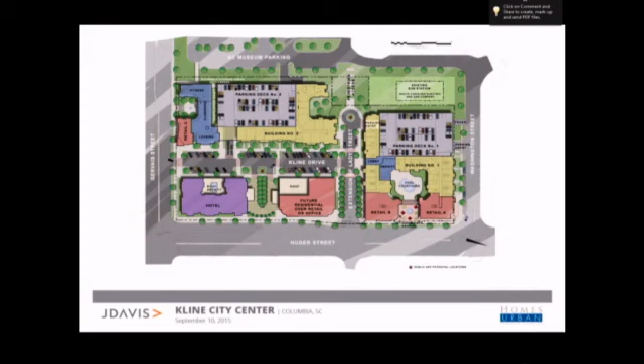Thank you, hello again. As Russ said, we've made considerable effort over the last 30 days to work with staff and address what we thought were some good, compelling comments at the last meeting. So I'll jump into it. Rather than proceed according to the comments, I thought it might be easier to walk around the buildings and address how we've accommodated comments, first on Building 1 and then on Building 2.

This is an overall plan of both buildings, of the entire site, with areas redlined that are specific to areas we paid additional attention to. Generally, the comments were about the finer grain details of the pedestrian experience around each building, and a lot of them had to do with scale and detail. So we've looked at the areas around the commercial areas, specifically the storefronts, and also the area on, well, let's start on Washington Street.

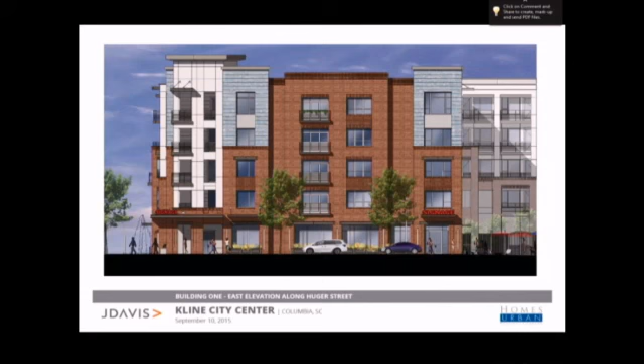It matches the lintels, and it's a steel channel. On top of that channel we propose LED lights, forming up and down lights that we've had success with in the past.

I'm going to move on to the Lady Street elevation. At the commercial storefronts around the corner of Lady Street, a similar design strategy. As we move further down, there were concerns about the scale of the building as it stepped down.

We've made additional detailing at the base of the balconies as the building extends below the floor elevation. We've rusticated the brick, a strategy I know the architects understand—in this case every 4th course will be projected, creating a shadow below the floor line.

We have also provided planter boxes on either side of the garage access. And by the way, we've eliminated a great deal of the darker brick.

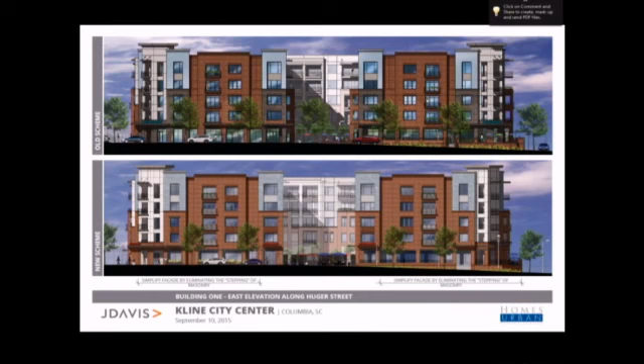So we've reserved the darker brick for just specific accent elements, like the stoops and balconies, in this location.

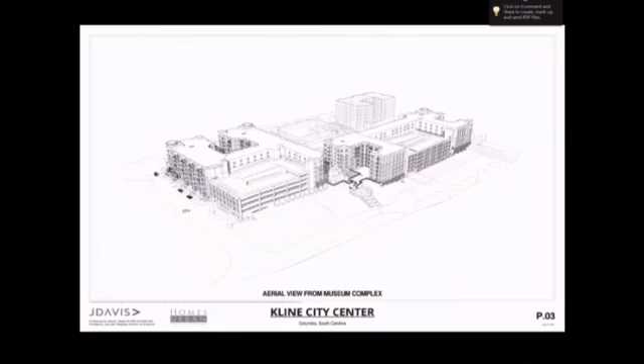One of the things the client has committed to is an art program for the site, and we thought a really positive location for the art was, rather than just doing some stationary sculpture, to make it integrated with this gateway concept that linked Lady Street to the State Museum property.

This is absolutely not what we're proposing, but this is the location we're proposing it in—so you'll see it on axis with Lady as you enter the site off of Huger. In the lower right is an example of gateway art we commissioned last year that was installed earlier this summer.

The concept is that it'll be tall enough to be seen and signal the connector through to the museum property. As I said before, our intent would be to commission an artist with the idea that the art would pay homage to Kline Steel.

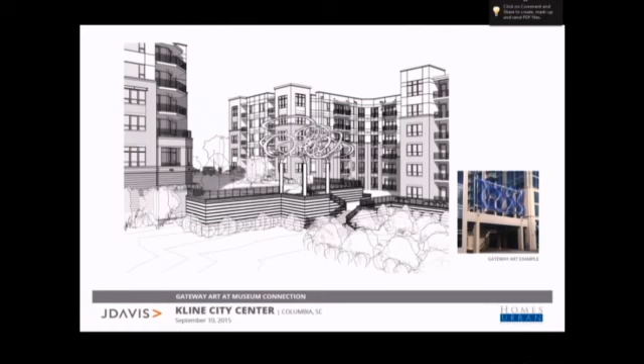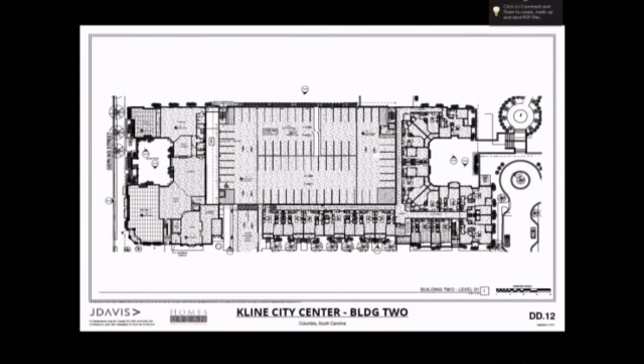Building 2—primarily the comments were directed to the far left side, the south side of the building, and the south elevation, east and west elevations.

Similar to the previous plan for building 1, we changed the brick at the corner from the brown to the red brick. We made similar proposed design interventions at the storefront, setting it back using very similar steel details.

This may be different than building 1—I would hope we'd develop a slightly different palette, but for place-saver purposes this shows our intent. I think one of the conditions was that we come back in the future with a more detailed presentation of enlarged storefront details.

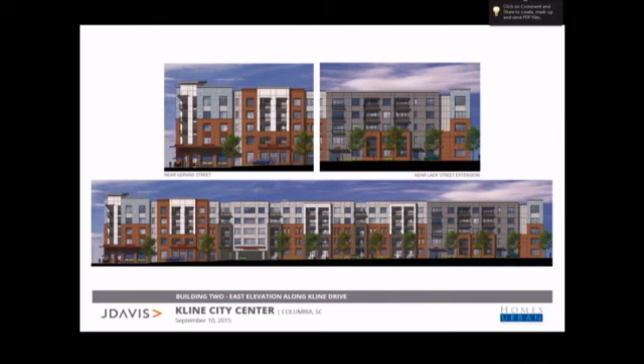So the upper left-hand corner is essentially the revised proposed design. You can see the flower boxes and so forth. Wrapping the corner, there were a couple of concerns—I think 3 specific concerns, or maybe 4.

I think Gervais Street took a lot of the conversation last month. There were concerns about the scale of the height of the windows, and concerns about that particular elevation, not unlike all the other elevations, perhaps looking at the broader context of this building on Gervais Street.

The pedestrian experience on Gervais Street, specifically how it interfaced with the courtyard, and as one moved further down Gervais Street—because the first level was so far out of the ground—how to mitigate the scale of that condition.

And then I think Mr. Savory had a great comment about what anchors the corner of this building as you approach from the southwest.

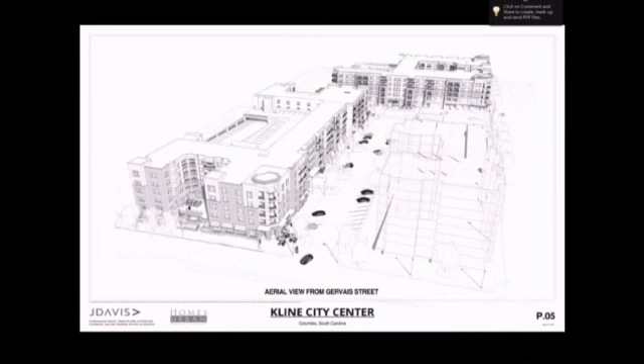So similar strategy on the storefront, stepping it back 2 feet, adding the planters. We pulled the height of those windows down. You still see the steel lintels. We added standing seam metal canopies, at least that's the intention right now.

At the courtyard, we have step planters, much more elaborate step planters that step closer down to seat height, and created a pergola gateway at the entry to the courtyard. It's still a private courtyard, but we wanted at least at that scale to not feel so separated between the sidewalk and the courtyard.

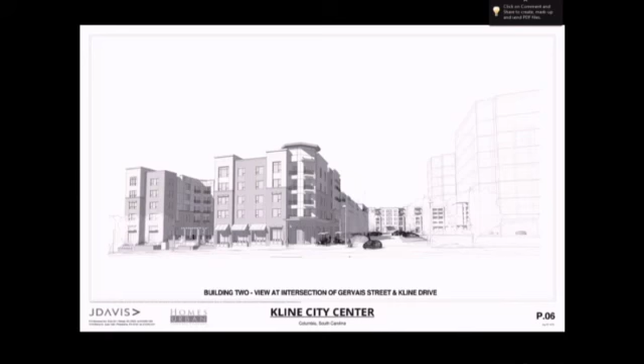Further down, we've broken the windows into what is the yoga studio with sunshade structures at a mid-level. So there's transom windows above that, and then step planters, which you can also see. Let me go to this one and go back.

This is really to show the change in the elevation. We've removed the porches that were on this elevation and shifted them to the inside of the courtyard to create a little more of, I think, a masonry facade. It still has elements, obviously, that tie back into the larger project.

So this is probably the best slide as you approach the building from the southwest. There's a corner tower. There's also additional detail along the back side, before the parking deck. So the building really, as we looked at it, did appear to be a little bit of an afterthought, the design of this edge of the building.

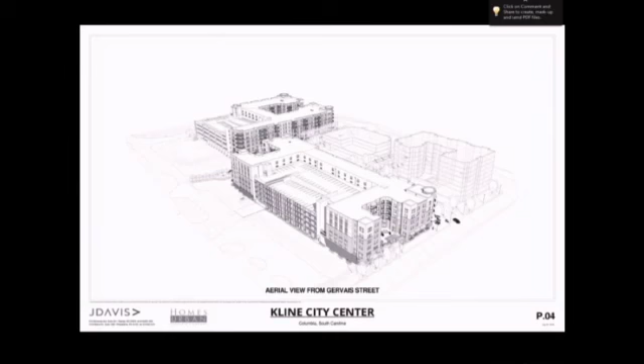So at the top elevation is really the elevation that you would see as you approach from the southwest, and there's a kind of an anchor tower of sorts in that location. This also shows the rusticated brick below the floor elevation that's consistent with the treatment on Building 1 as well.

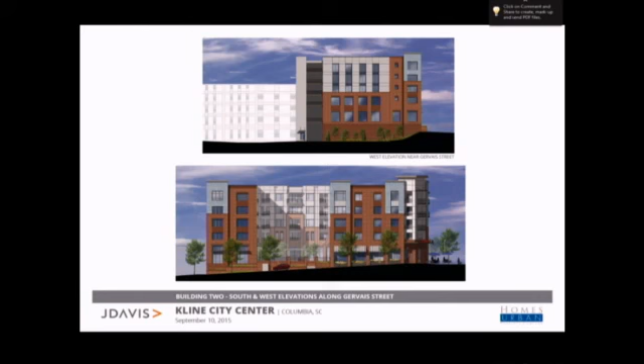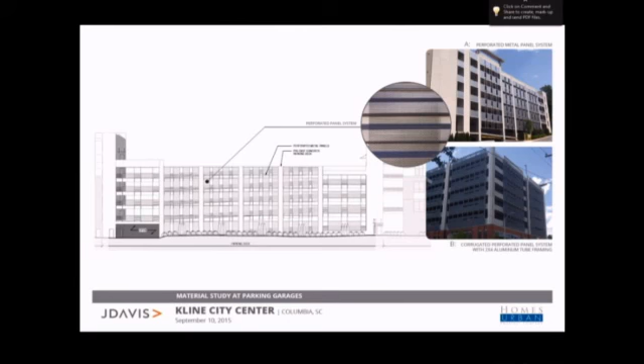One of the conditions is that we come back with more detail on the screen of the parking deck. I hope you appreciate that it's a very complicated design exercise, specifically as it relates to cost. So we're exploring a number of different opportunities to screen the deck. The commitment's there to do so, and to do so in an elegant way.

One of the comments has been, how do we screen the mechanical equipment? I had outlined that the mechanical equipment on these larger multifamily projects is typically located, each residential unit has a heat pump, so there's a whole lot of them. But you also don't want them above the residential units, and so they're located traditionally along the corridor for sound attenuation reasons. But that also creates a location that is easily screened. So just diagrammatically, you would be hard-pressed to ever see the mechanical units.

That's our presentation. I'm happy to answer any questions.

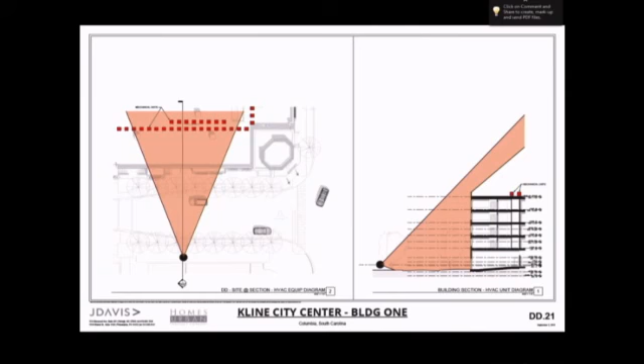Any thoughts from any of the commission? Any questions? Thank you, sir. Is there anyone here who has anything additionally to add or to say in opposition to this project? Sir?

Hi, my name is Steve Henson. I live in the Vista, and I'm on the Vista Neighborhood Association. And just want to make a few comments. The developer was nice enough to meet with us, along with some other people in advance. And I mean, we're excited about the Kline building and the development that's going to take that basically empty lot there as you enter Columbia.

We think that's good. But we are a little bit concerned about the height of the hotel. Now, we're not really talking about the hotel portion today. But I think the hotel is planned to be an 8-story building. I think the scale of the rest of the buildings is around 5 floors. We're a little concerned about the height of the hotel, which hadn't been planned, and again, we're not talking about it in detail today. I think originally, and we know this is a PUD, so there's probably not much we can do about the height of the hotel. I know originally it was, I think, 110 feet, and now that maximum height's been lowered to 90. I guess our primary concern is kind of the future.

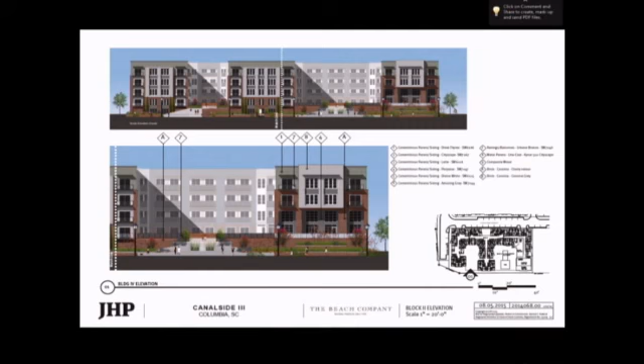So as I followed you through your presentation, the areas that you propose to have restaurants and/or retail are not on the canal side. In building 6, this elevation would be entirely commercial at the ground floor, but primarily office use is our thought, and it's hard to say at this point. It's a little difficult because this is a dead-end street, so it's unclear what kind of retail we're going to get in here.

I would offer the idea that perhaps you might consider, as you work with staff, enlarging the presence of retail, restaurant, and pedestrian-friendly uses along the canal side and promenade areas, considering the city's view of what this future canal is really going to present to and for the city, and might add quite a bit. You have an opportunity there.

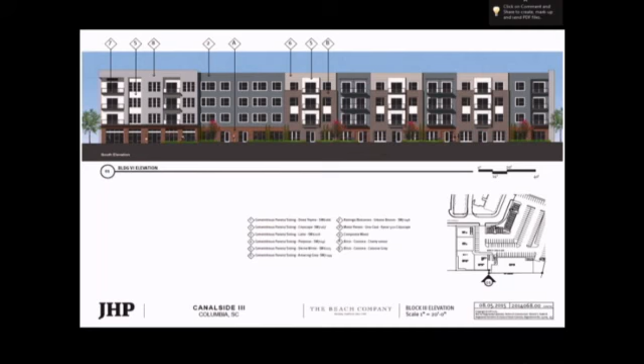Yeah, I think our hope is that this elevation would be active with the restaurant. We'll continue to review that with staff. It's a little challenging from the economic side, if I'm being honest, just being where this site's located, but we'll continue to look at that, and I understand that activating the street and the canal is important.

I'm correct that this is where you're proposing the restaurant? That's correct, and this is commercial along here, correct? Yes. They're proposing the restaurant here, and then it's commercial all through here, and that's office space along there, which ideally you would have more restaurants, obviously that would be preferable, but I think the direction of making this commercial space of some sort is the right direction.

I guess what I'm wondering is, when you get up here, we see these facades are quite a ways back, but they're still pretty plain. A lot of that could be mitigated if you could put even a small restaurant here that would be not just for the residents of this block. It wouldn't have to be really robust, but if there were just some kind of destination there, that would be helpful.

Getting back to Ashby's question about the amount of brick, in my mind, and other commissioners chime in if you have a different thought, I don't know if you have any brick facing the parking lots, but if you do, it seems to me that brick is kind of the precious commodity. It would be best to put that in the public realm.

That's a good point, and I'm not sure how much we have at those elevations. Definitely at Block 3, I think there may be some. I think it would be fine to differentiate that way. To some extent we've already done that, but there may be an opportunity to do more of that.

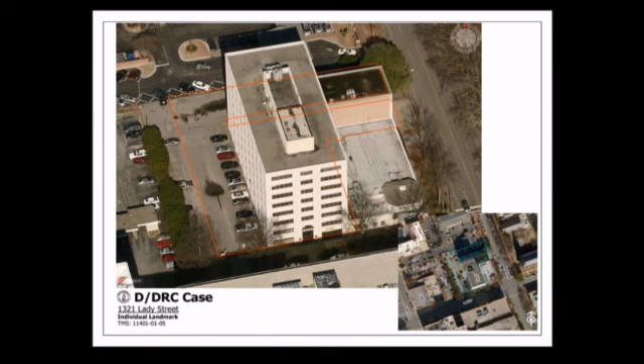Thank you, ma'am. Any thoughts from the commission? Or Mr. Prioreshi, do you have anything to present or add, sir? Can you step to the podium and use the mic, please?

I think Amy described the situation pretty well. We're asking for a compromise because after we got into really realizing what the problem was, we think we're going to have a significant issue, the same problem they've had since the building opened, which is a leakage problem on the design. They had to hold the chicken wire glass in. So we came back and sought relief. That's really the bottom line. I don't know what else to say.

Thank you, sir. Any questions from commission? In this motion, we're simply giving staff the authority to make these decisions from window to window and from floor to floor, rather than applying it to the whole building. Yes.

I went over, since it's pretty convenient, and took a look at the sample window, and it makes a huge difference to take that nasty tinting off. And you're right, for some reason it obscures the visibility of the wire. I've looked at it from all different angles and couldn't figure out why, but I think it's because you get more visibility through the glass.